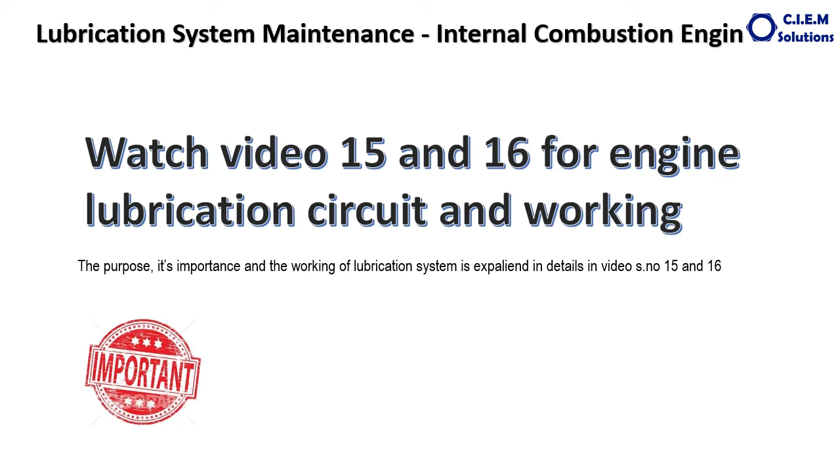Same way, the maintenance of the adopted system, whether it is a lubrication system, air system, cooling system, or fuel system, is equally important. What is the maintenance? As recommended by the manufacturer, using the recommended grade of lubricants, recommended genuine filters, changing at the recommended intervals, maintaining the logbook, and also testing or inspecting the removed filters and the drained oil - these are some of the maintenance activities.

When it comes to the usage of the recommended engine oil, the engine oil recommendation is decided by the vehicle manufacturer. What grade of oil has to be used? The recommendation depends on many factors.

For example, the clearances between the moving parts, that is the bearings, crank journals, connecting rods, guides, valves, gears, etc. Also the ambient working temperature - whether the engine is working in India or working in the South Pole or North Pole, whatever may be the ambient temperature - and also the size of the engine and application of the engine based on so many factors, and also the weight to horsepower ratio. So many factors are involved in the recommendation of the grade of the oil.

Development in lubricants recommendation: in the past, that is in olden days, vehicles were running with monograde oils, that is single grade 40 oil, 30 oil, like that. The SAE 40 represents the viscosity of the oil, so this is monograde oil. The viscosity recommendation again depends upon the ambient working temperature and also clearances, etc.

But the problem with these monograde oils is that they change their viscosity rapidly along with variation in temperature. For example, a vehicle is running at 40 degrees ambient temperature, and the same vehicle may operate at maybe 15 degrees centigrade or even 0 degrees centigrade. Somewhere the vehicles are to be used even at minus degrees also. So the temperature variation leads to rapid change in the viscosity of the oil.

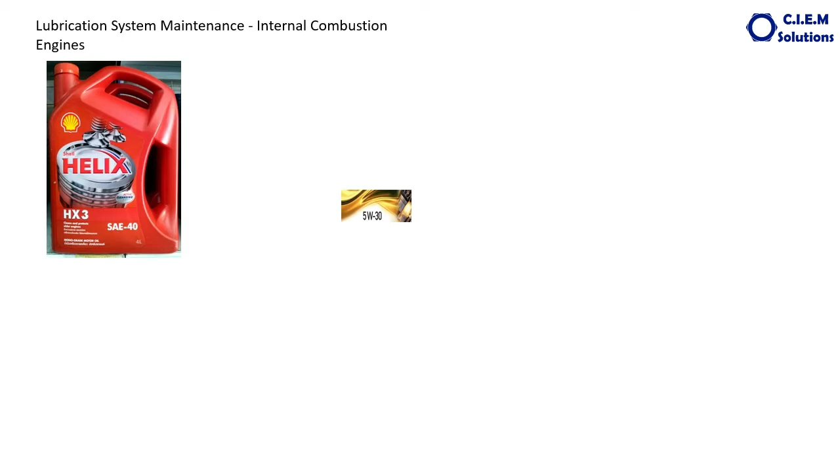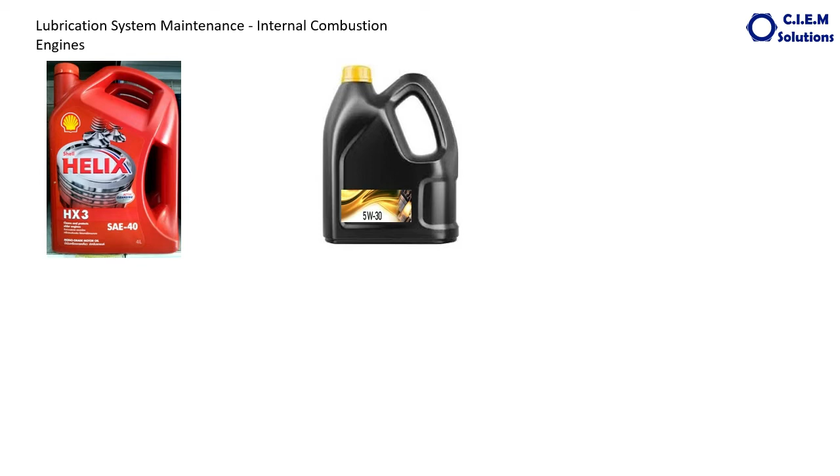So over a period of time, these monograde oils were replaced with multigrade oils. The multigrade oils are manufactured by blending low viscosity oil with special additives called viscosity index improvers - it's a kind of polymer which improves the temperature or viscosity characteristics of the oil. So this is the multigrade oil. Multigrade oils also have the advantage in fuel consumption of about 2 to 2.5%. And further, the latest development is synthetic oils. The synthetic motor oils are premium products that offer many benefits over mineral oils.

Both the monograde oil and the multigrade oil are categorized as mineral oil. This synthetic oil is the latest development. Even though the synthetic oils are expensive,

they last longer and give better engine protection. The low pour point makes them ideal for starting the engine in cold weather, and high temperature stability gives increased engine protection to hard working cars and trucks.

Let us look at these three pictures. We can find the advantages and differences of this multigrade oil and the synthetic oil over the monograde oil.

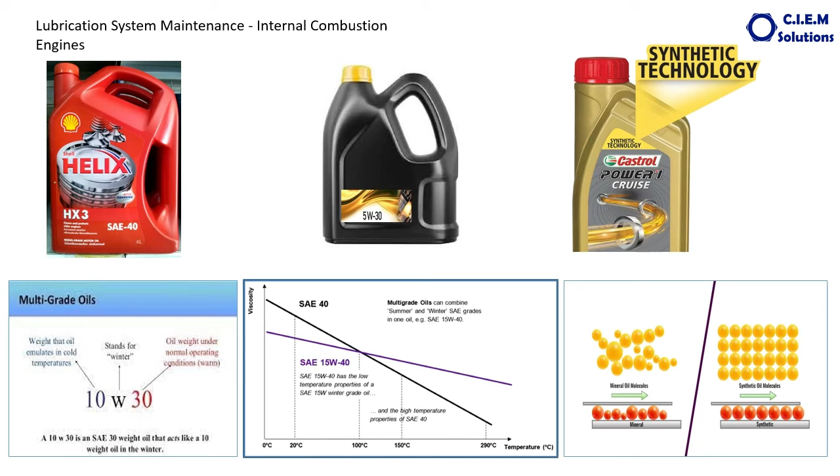Next, filters. We have already seen how the oil flows through the filter. The oil comes from outside, enters into the holes, goes from the outside of the filter, filters through the paper element, then passes through the center and goes to the engine.

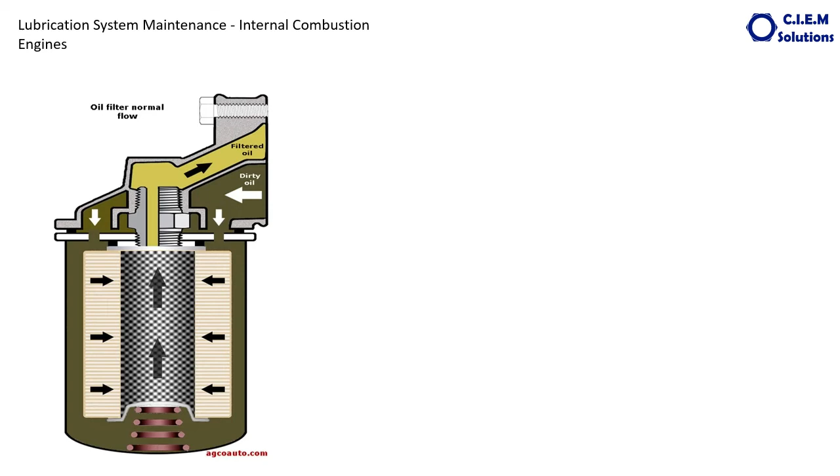Here again, the quality and area of the filter paper used in the filter matters a lot for the quality of the lubrication flow.

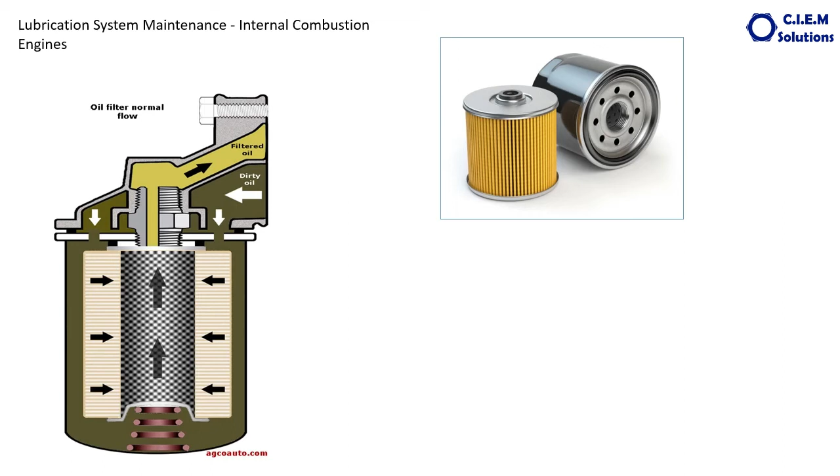When you see some filters here, for example, this is the genuine product - how the internal structure looks when you inspect through a microscope - and this is how the imitation filters look.

The way the oil passes through this mesh, here it cannot pass. This filter gets choked very early compared to this filter.

So always use only genuine filters. The filters are made with special paper to filter all impurities, including carbon deposits, dirt, and worn out metal particles, that too at oil working temperatures.

A filter of poor quality paper may collapse beyond a certain temperature, may create restriction in oil flow, or may allow unfiltered oil into the system. All such situations lead to premature wear of engine parts and even catastrophic failure of the engine. So it is essential to use only manufacturer-recommended genuine oil filters.

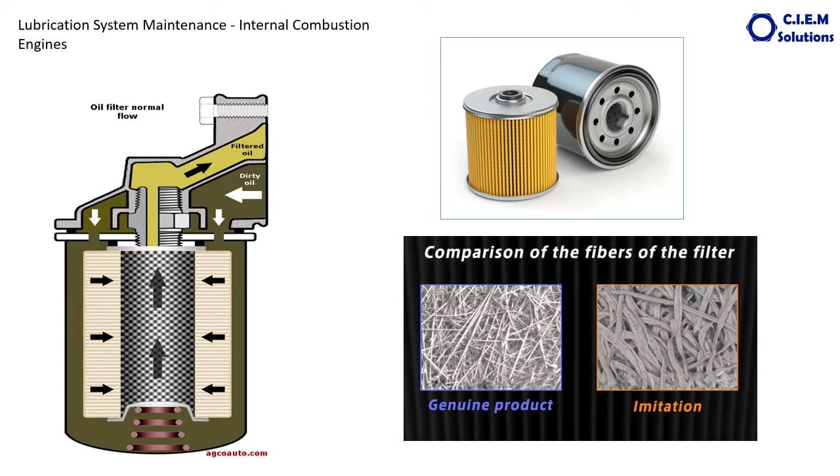Another important factor of maintenance is the storage and transfer of lubricants. Storage may be in barrels or cans, depending upon the volume required. You can see how beautifully they are stored. These are the barrels and these are the dispensing pumps. There is no manual pump involvement here, and these are the transfer cans of different sizes.

They have provided different cans for the different grades of oil. You can see even the cap colors are different, because we should not use the same can for different grades of oil.

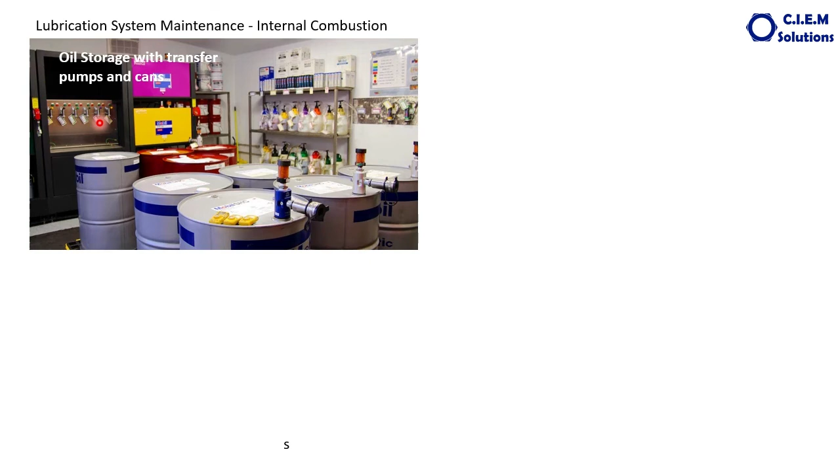These are the dispensing pumps again here. Another storage facility like this - this is the bulk storage, and these are the dispensing taps, various taps for various grades of oil. These are the cans, provided on this side also.

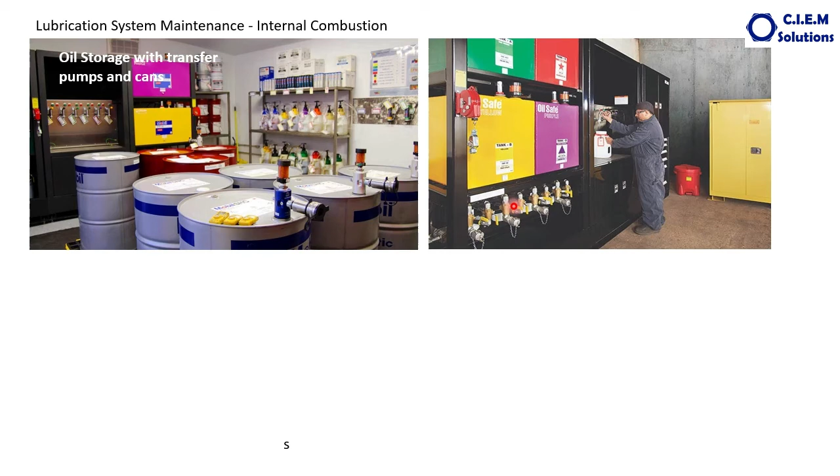The floor and the dispensing storage area should always be very neat and clean to avoid any dust entry into the system. In case any dust attaches to or mixes with the lubricants, it will go into the engine and lead to premature failure due to premature wear and tear of the moving components.

This is another bulk storage system, with all the barrels and dispensing units. These are the transfer pumps.

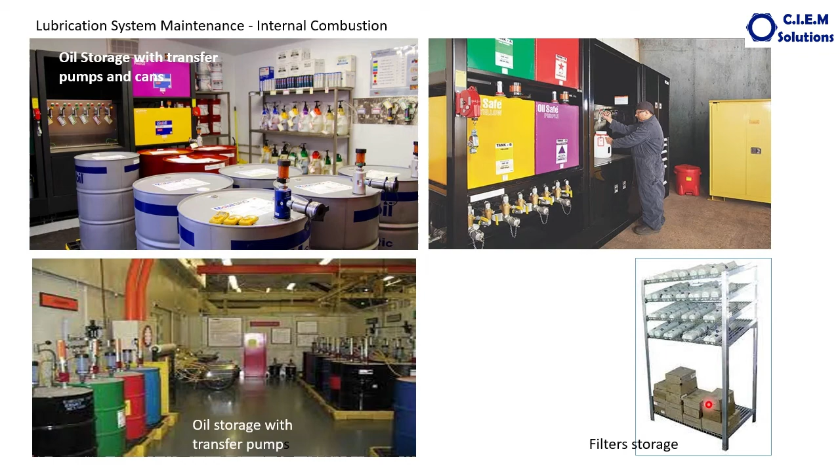See how the filters are stored in carton boxes and in polythene covers. The polythene covers are to be opened only at the time of fitment.

Then coming to other items like the drain plug of the oil sump. When the drain plugs are removed, before removal the dust is to be thoroughly wiped, then it has to be removed. The gasket or rubber gasket is to be changed during fitment, and it has to be tightened with the recommended torque.

Same way, the filling caps are to be thoroughly wiped before removal. Clean the plug, remove it, drain the oil, change the gasket, and tighten with the specified torque. Then take out the cap by thoroughly cleaning the top, fill the required quantity of oil, and this is the dipstick to measure the oil level.

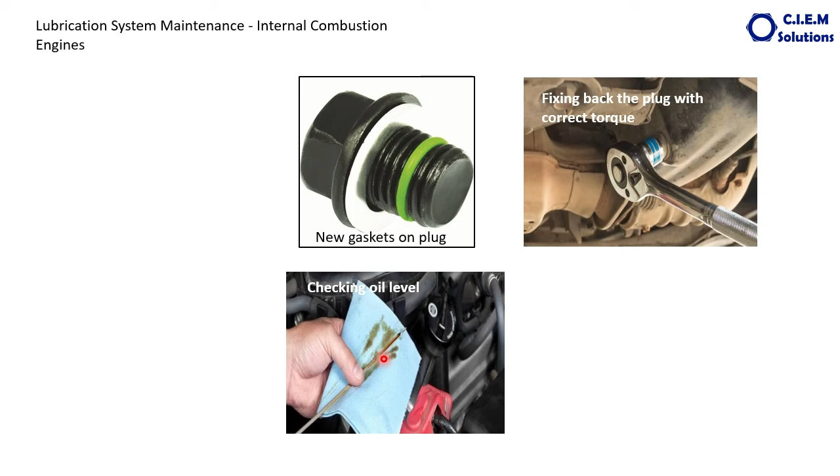The dipstick has to be removed, ensuring no dust sticks onto it. It is to be wiped once, then the oil level measured again to ensure it is within the specified limit. Another important step is inspecting the removed filter and also testing the drained oil.

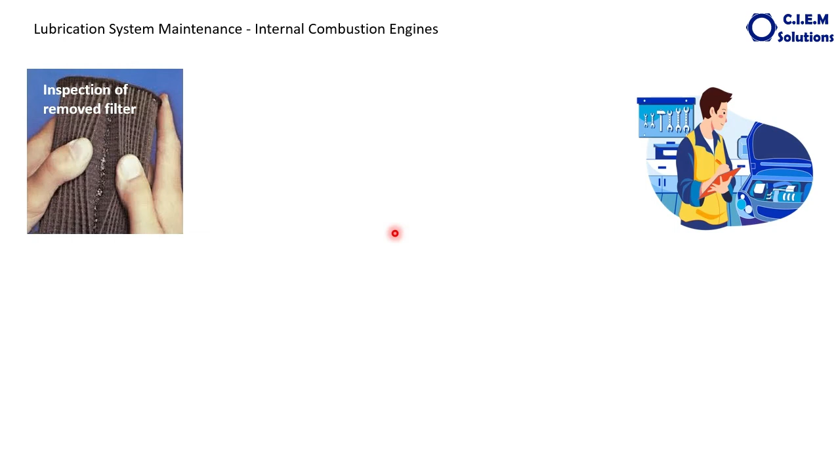A removed filter must be inspected by cleaning it with diesel. It has to be inspected thoroughly for the presence of any metal particles. See, this is how the filter paper has to be removed by separating the top and bottom, and inspect the filter like this also.

This inspection helps us identify any metal debris from the engine, so that preventive action can be taken to minimize the damage.

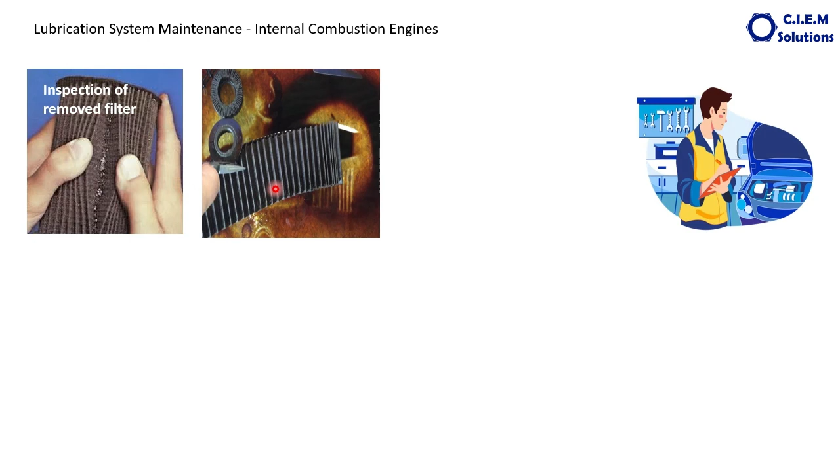Same way, an oil sample has to be drawn as specified by the vehicle manufacturer, and it has to be tested in the shortest possible time for engine metal particles like iron, chromium, aluminum, lead, etc., as well as silica (dust), water content, and fuel content. This indicates any premature wear or any mixing of water or fuel in the system.

So this oil testing helps in identifying the problem at an early stage, and also helps prevent major engine failure by taking necessary preventive measures.

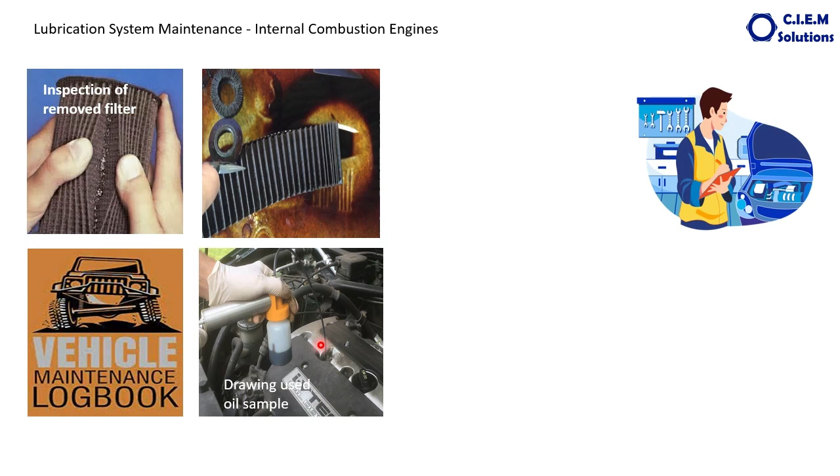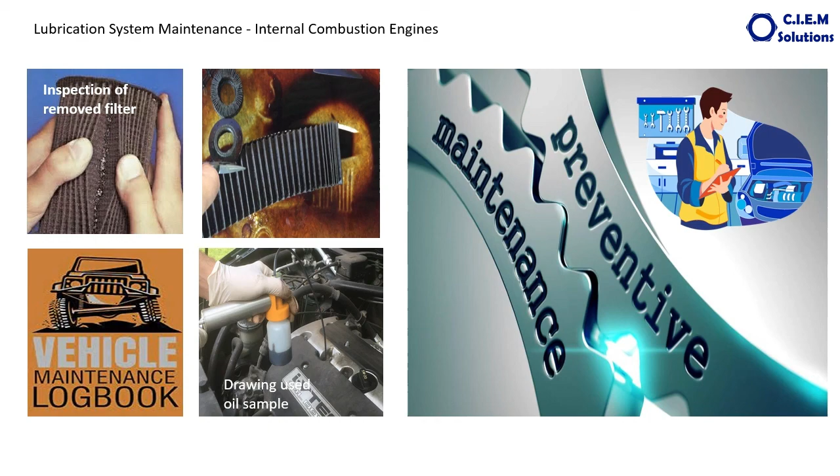Another important activity is to maintain the vehicle logbook, that is the recording of each and every preventive maintenance or scheduled maintenance activity. This is how the maintenance has to be done for the lubrication system in the engine.